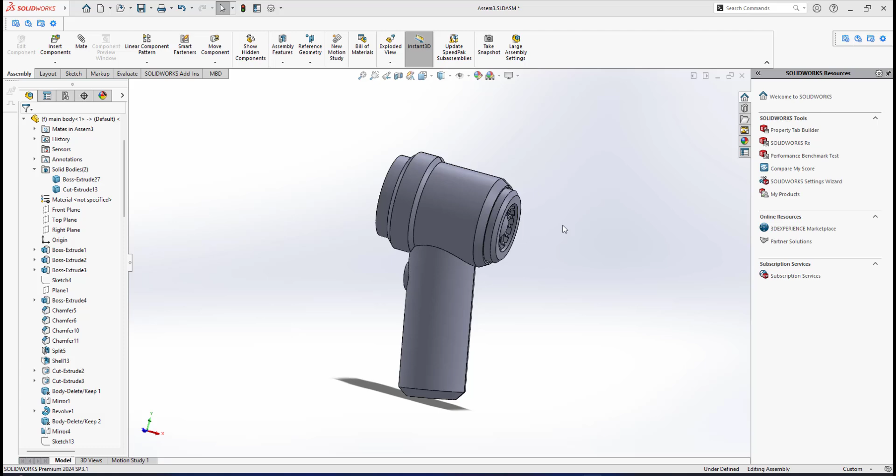In my previous video, I have already shown you how I have done detailing of this rear and front casing, where I have shown you how I have done the supporting ribs to hold the batteries, the rechargeable battery, and also the supporting slot to hold this PCB.

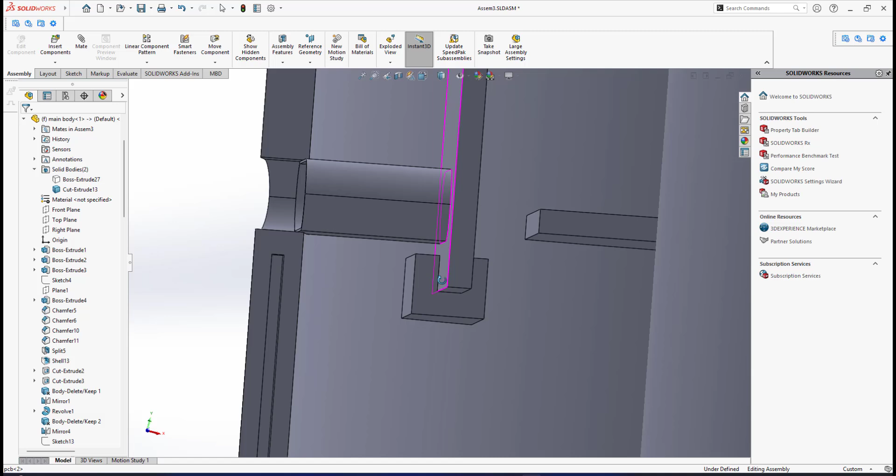Alright, actually I need to mention that I have made a few adjustments here, corrections here. In my previous video, the slot here was a little bit longer, and we had kind of an interference overlap with this USB port. So I have already made some adjustments, made it shorter so we don't have any interference, right? And also about the position of the battery, I have done some adjustment.

I made this battery a little bit lower, so it means that I have some more space here, because later I will show you how I will make cut through holes to make way for the wiring. Alright, so the position of the rechargeable battery I made lower.

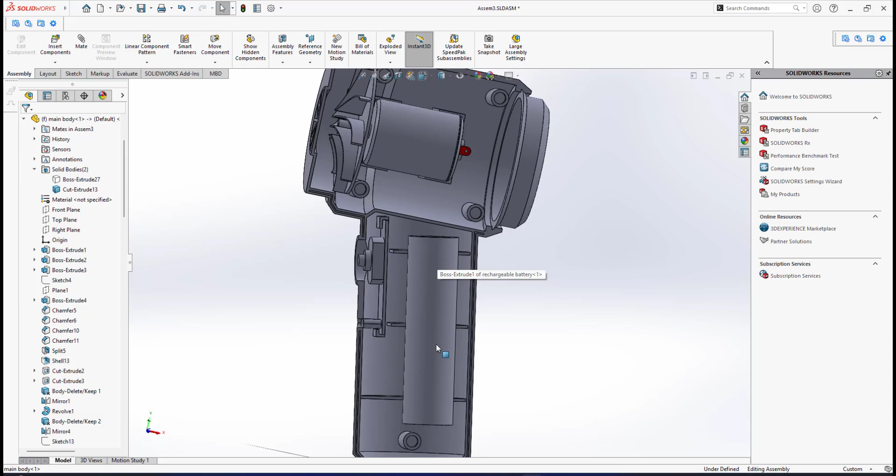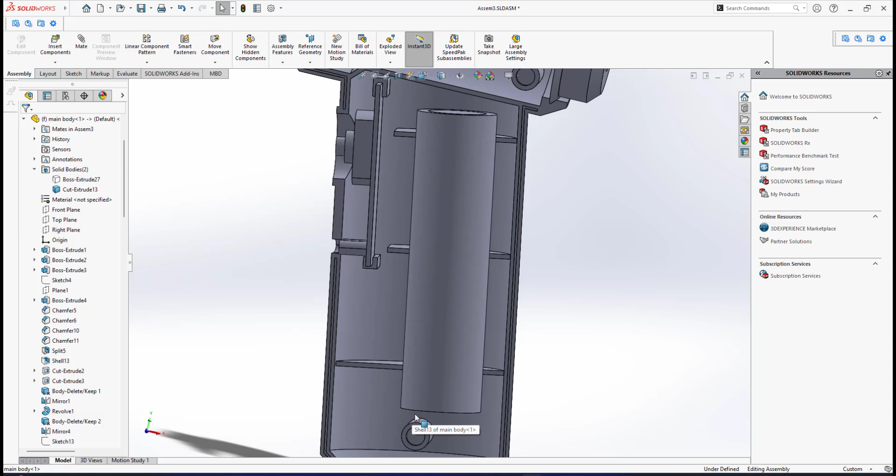Also, in my previous video, I forgot to add these features. If I'm not mistaken, in my part 3 video, I've shown you how I've done this pin for this rear casing, and also the other 4 pins for the front casing. I forgot to add those features at this position. So I added this pin at the rear casing, and also a pin at the front casing.

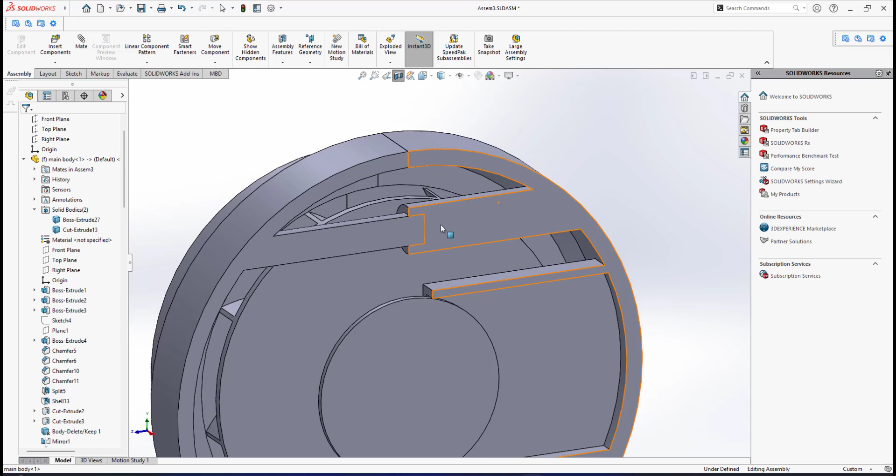So I will show you the continuation in this video for final detailing of this rear and front casing, where I will show you how I will do the fastening features. As you can see, on this front casing we have fastening features. If I go to the section view, since we have this pin on the front casing and this bigger pin on the rear casing, I will show you how I will insert a screw, where the screw does the fastening of this front and rear casing.

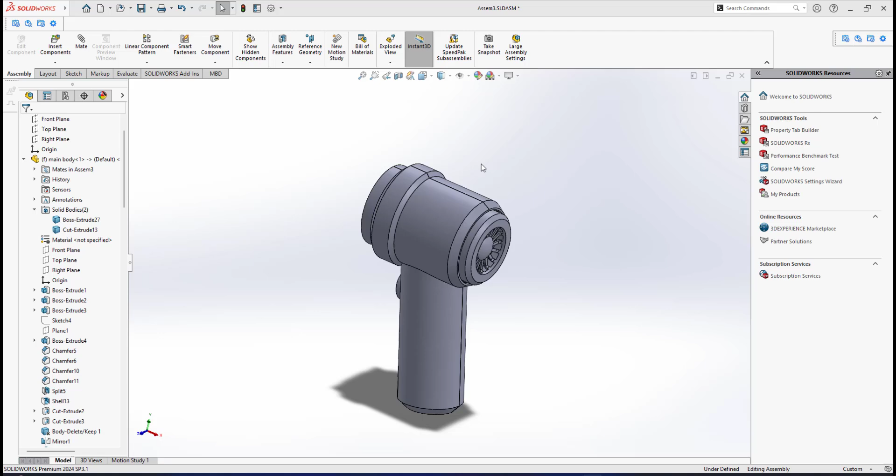So I will show you how I will create cut through holes here, and how I will do the inner thread for both pins here at the front and rear casing. Alright, so I will show you how I will do this in SolidWorks. To do the fastening features, I will not do it in assembly mode, I will do it in part modeling mode. So I open this main body file in part modeling mode. Alright, now I'm back in part modeling mode, where I have the front and rear casing.

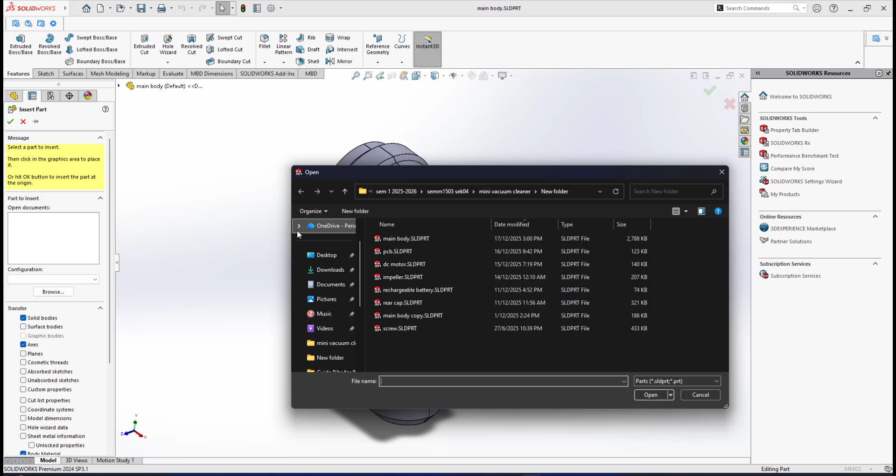Actually, I've already made a part model of this screw, the screw M1.5. It is an old file that I've done for my previous project, the portable mist spray fan. The same screw size, which is a small screw M1.5. So I will insert that part in this part modeling mode. Under the menu we have Insert, I will insert part. So I will browse for the screw here, the screw M1.5.

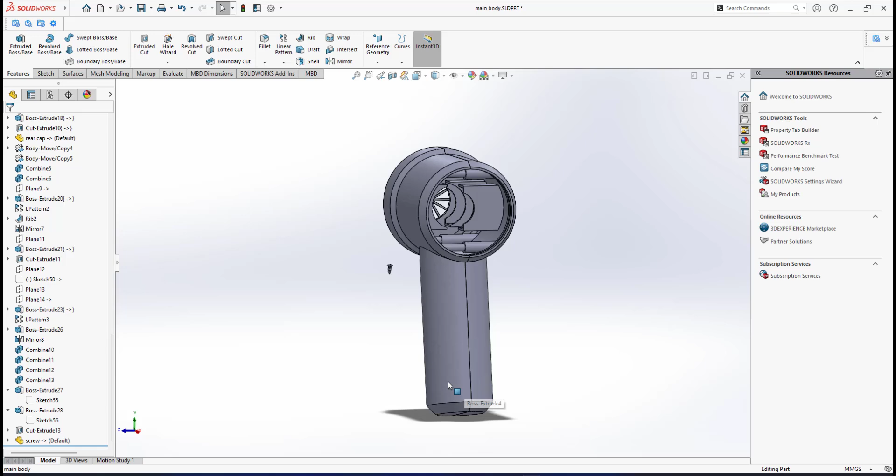So I will put the screw somewhere at this position. Alright, now I put the screw into position. Now I will clone this screw into 4 copies. Total is 5, because we have 4 pairs of pins at the top and 1 pair of pins at the bottom. But before I do that, I need to create cut through holes here. Since we need to fasten the screw at this position, I have to do 4 cut through holes here, and also 1 at the bottom.

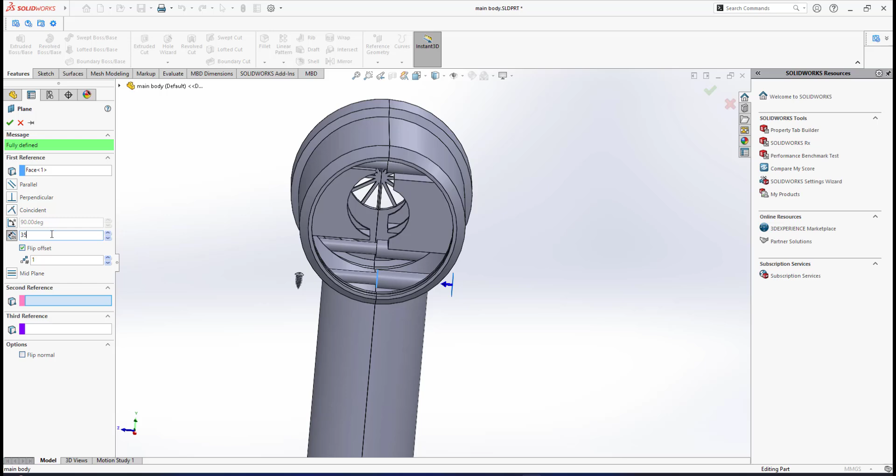Alright, in order for me to do that, I will go for plane, and I will select one of these flat planes. I'm not going in this direction, I go for flip. This is 25 from here. I think this plane is good enough. Let me put it much further, go for 35. Okay, this distance is 35. So I will do a sketch on this plane, and hold on, I want it to be turned to the back direction.

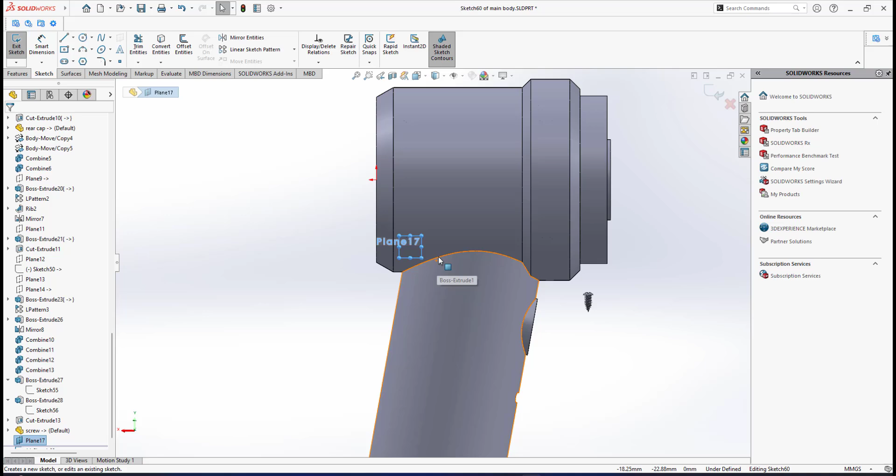So this is a back view from the rear casing, and I need to create the holes. First I go for shaded mode, the sketch mode, then I will make cut-through holes. Okay, the bigger circle here is the outline of the bigger pin on the rear casing. The cut-through hole is about the same size as this one, so I will select the smaller circle here, and also select this one.

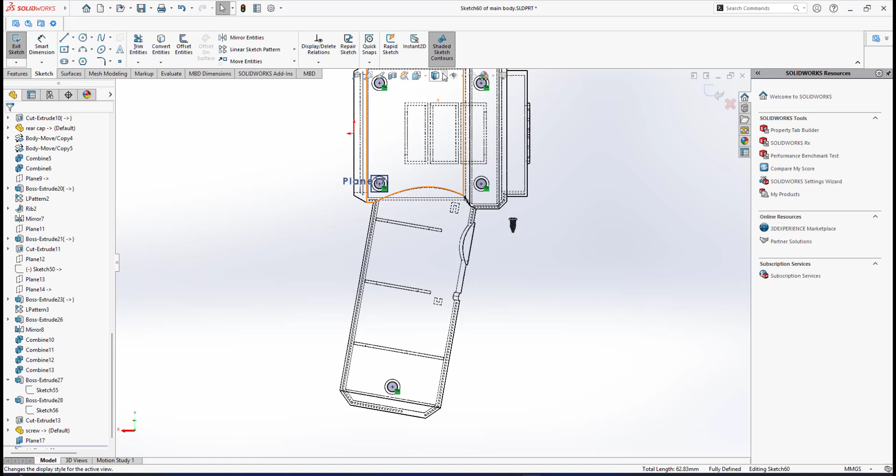I will select this one as well, and also the bottom one. Then I will convert entities. So I have a traced outline of those circles, and now I will do extruded cut. Alright, before I do extruded cut, let me exit first. I will isolate the rear casing first. I don't want to disturb the front casing.

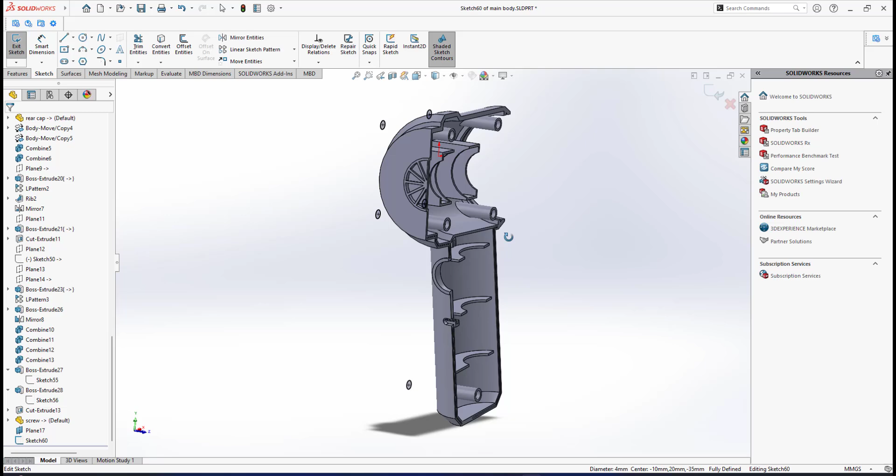And now I will edit this one, and now I will do extruded cut, features, extruded cut, and I go for this direction, and I must make sure that it's about, if I put on 25, let me check, let me go for 30. Okay, let me try for 30.

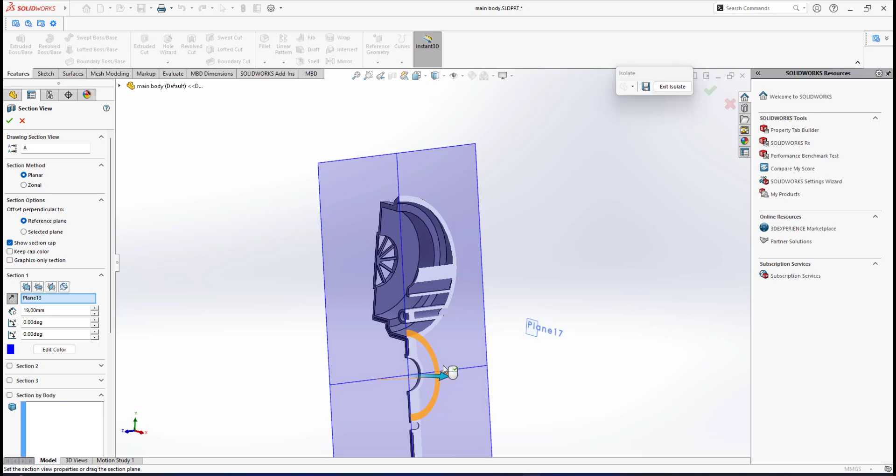So I made an extruded cut, and I will go for section view. Okay, let me go for section view. Then we have an extruded cut. Alright, for this at this position, and same goes for the other pin. As you can see, if I drag, we have a cutout up until this position. Right, same goes for the bottom pin.

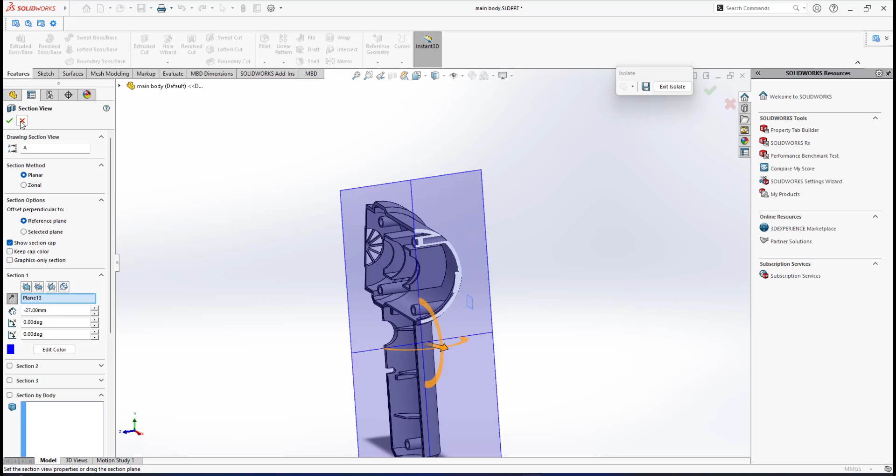Right, if I drag even further for the front pin, yeah, everything is good. Right, we have a cutout at this level. Alright, so I have done the cutout for the rear casing, and I exit isolate, then I save my file. Alright, then what I will do, I will do mate setting. First I must duplicate this into 4 copies.

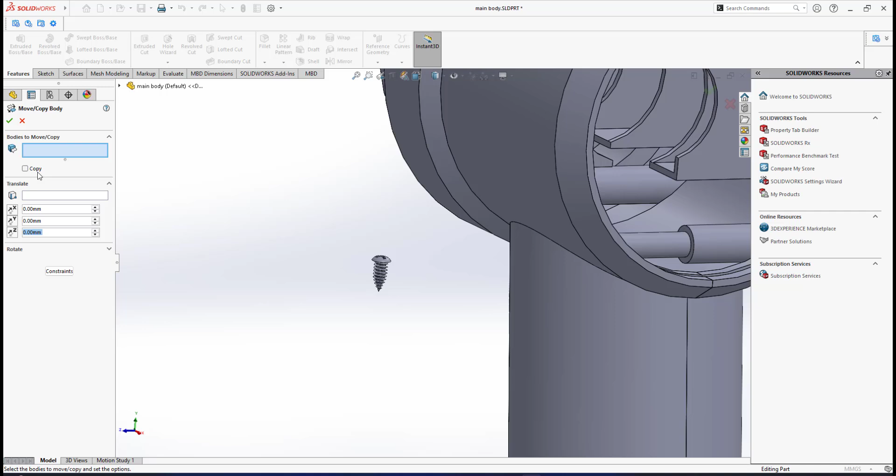Okay, in order for me to make this into 4 copies, I simply go for insert, features, move copy. I will not do the settings here, so I will go for the setting, translate, rotate, and make sure copy is checked. And now I select this original screw, then I make the copies 4, so it means the total screws I have is 5 screws.

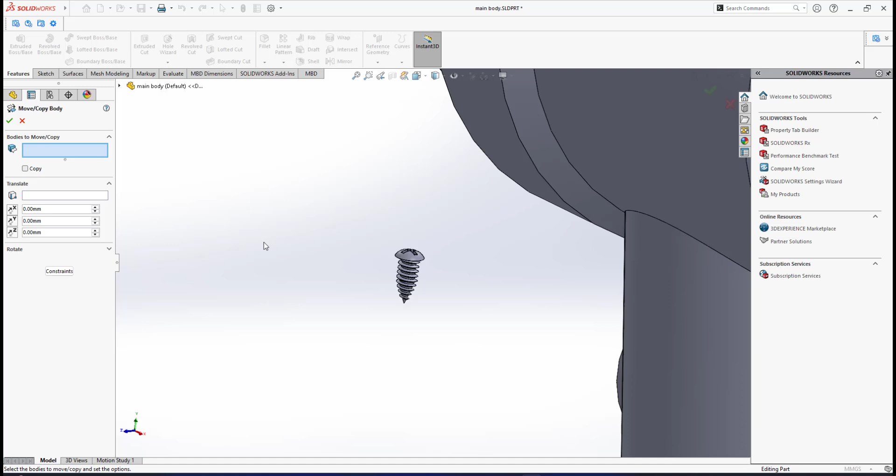Alright, since I have 5 screws already at the same position, let me just move them manually. Insert features, move copy. But now I uncheck the copy. I can move the clone here to somewhere at this position, and I have to do it one by one, and do again features, move copy. Make sure this copy is unchecked, because I simply want to move it. I don't want to clone to make a copy version.

Click again and insert features, move copy, select this one, and this one I put lower like this. Click OK, insert, do again. This one I put at this position. Right, so it's much easier for me to do the mate setting, since I need to put each screw into this hole.

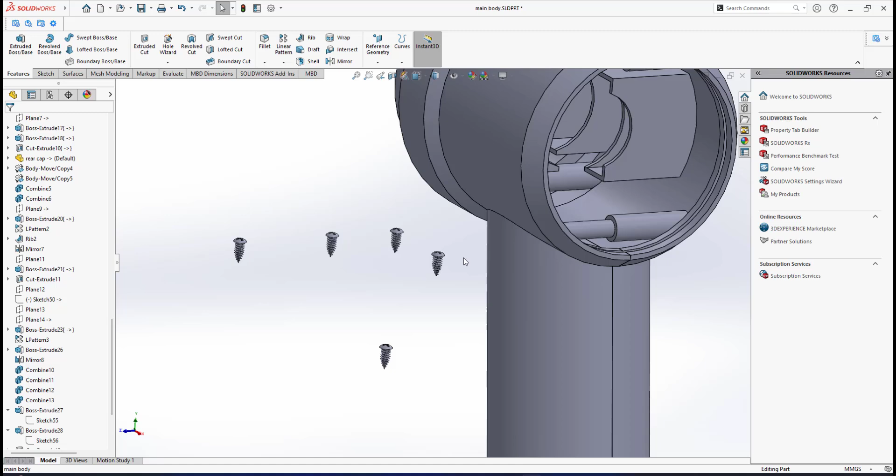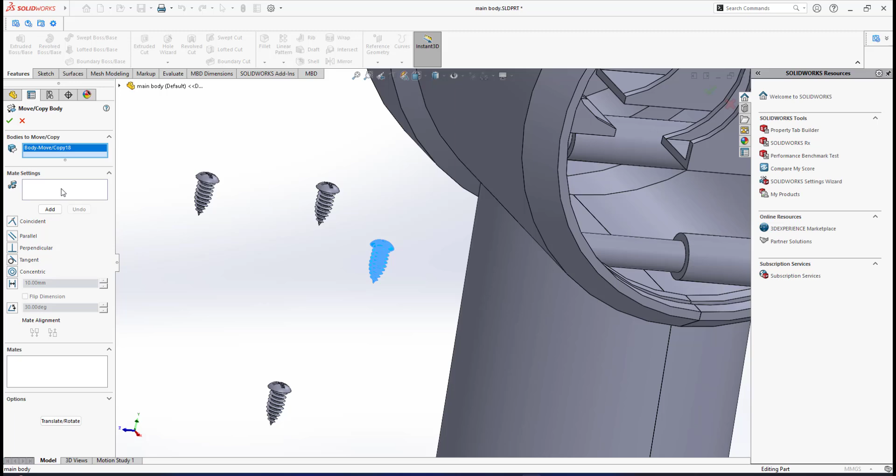Alright, for the first mate setting, I will do again insert features, move copy, then I will not do this setting, but the constraint setting. Okay, now bodies to move will be this screw. Here the setting is similar to the mate setting in assembly mode. So this screw, I have a cylindrical surface here, so I select the cylindrical surface, which will mesh with this cylindrical surface, so automatically it goes to concentric.

But as you can see here, the screw is turning to this direction, so under the mate alignment here, by default it is on the right one, so I click the left one. So it flips to this direction, and I must click add, so it means it reads the first setting.

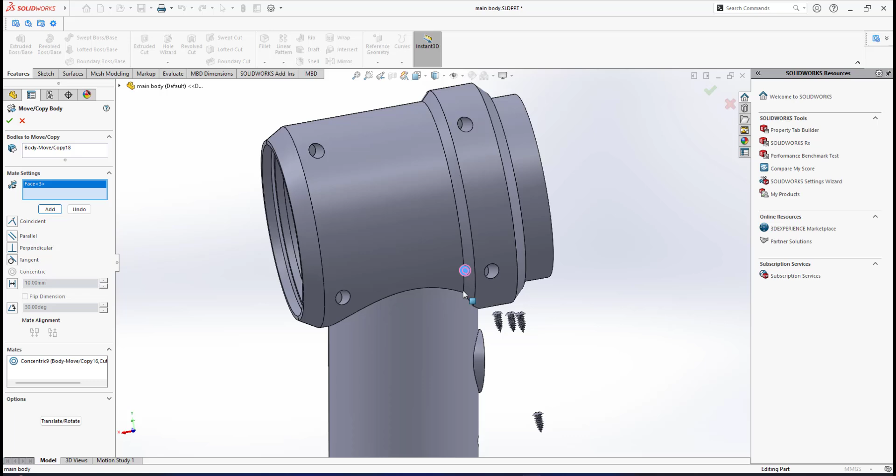Right? My second setting will be, I select this flat surface, because we have a dome head of the screw, but here a flat surface. That flat surface is already selected, and it must mesh with this flat surface, so the screw is in position. I click add, then I click OK. Now my first screw is in position. Alright, for my second screw I repeat the same.

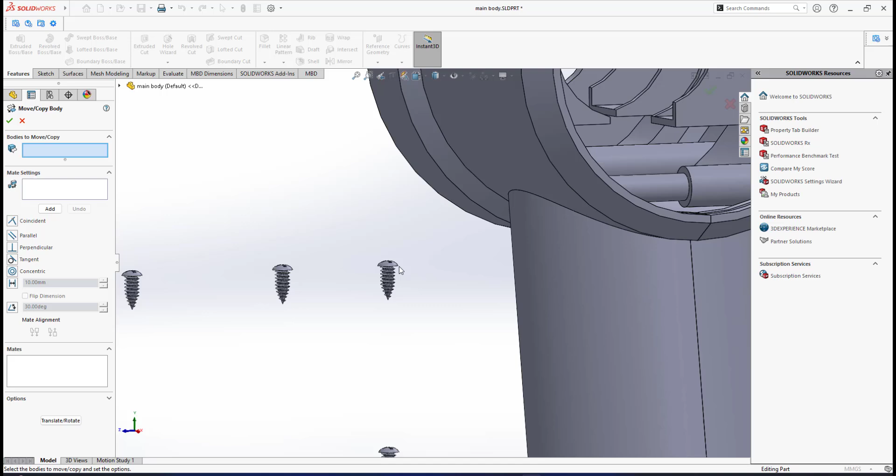Insert, features, move copy. Here bodies to move is this one. Mate setting, I select this cylindrical surface and it meshes with this one, but it turns to this direction. I go to mate alignment, I flip to this direction, I click add, and now my second setting, this flat surface must touch this surface. Then I click add and I click OK.

Alright, I will pause this video until I resume at the position where I have put the rest of these 3 screws into all these 3 holes. Alright, so I pause this video.

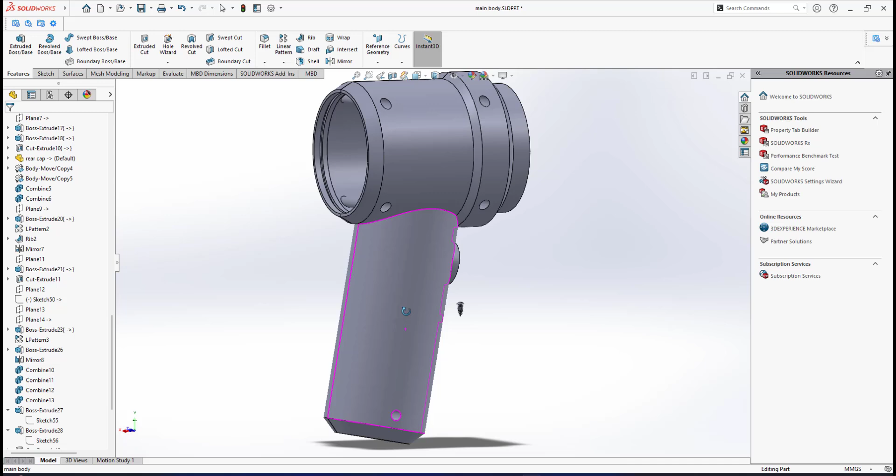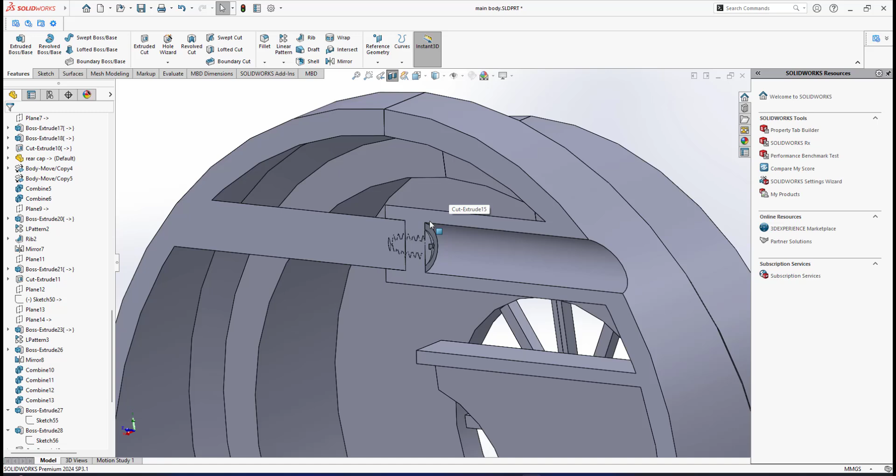Okay, now I have done putting all the 5 screws into position. Let me show you the section view. Okay, let me click OK. As you can see here, the screw is in position, all the 5 screws.

This screw is actually not meant to be in this part modeling file. The idea of me putting the screw into position is to create the inner thread of this pin on the rear casing, and also this pin on the front casing. So I will do combine, subtract to do the inner thread for this pair of pins.

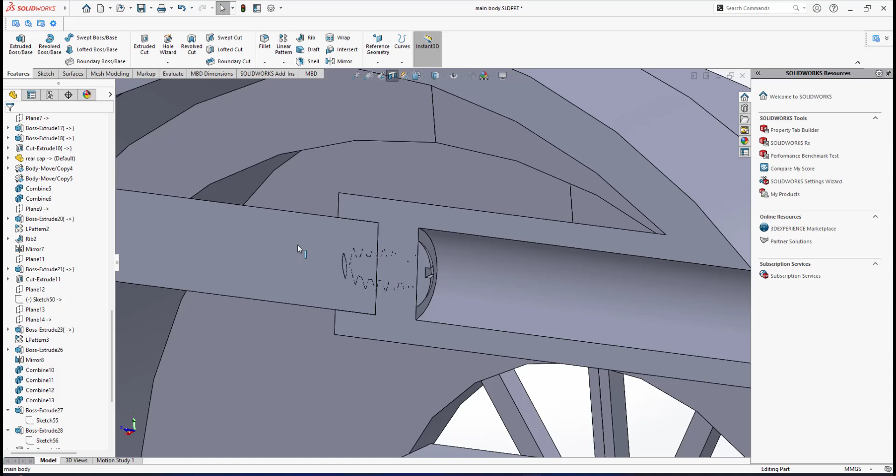In order for me to do subtract, each of the screws I need to clone. I want one to be subtracted from this pin, and the other clone version of the screw to be subtracted from the pin of the front casing. So it means both of these pins will have the inner thread. Okay, let me show you.

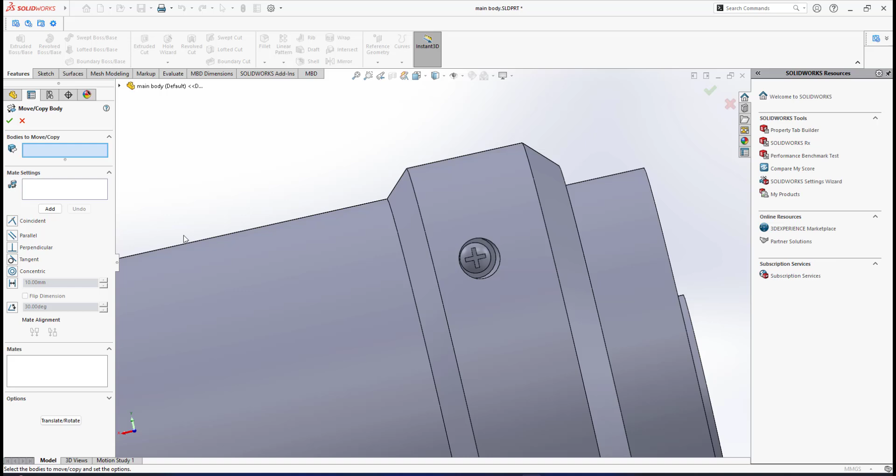Before I do subtract, I need to clone. It's kind of tedious, but this is the way I think we could do the inner threads. So I will use translate, rotate. Bodies to copy is this one. I cannot select everything because the list is only one by one.

Yeah, I can do that. Sorry, my mistake. I can do that, and I can select this one, this one, and this screw. Then hold on, delete it. Make sure I select the proper screw. Okay, this screw is selected. Actually this is the screw name, and this one as well.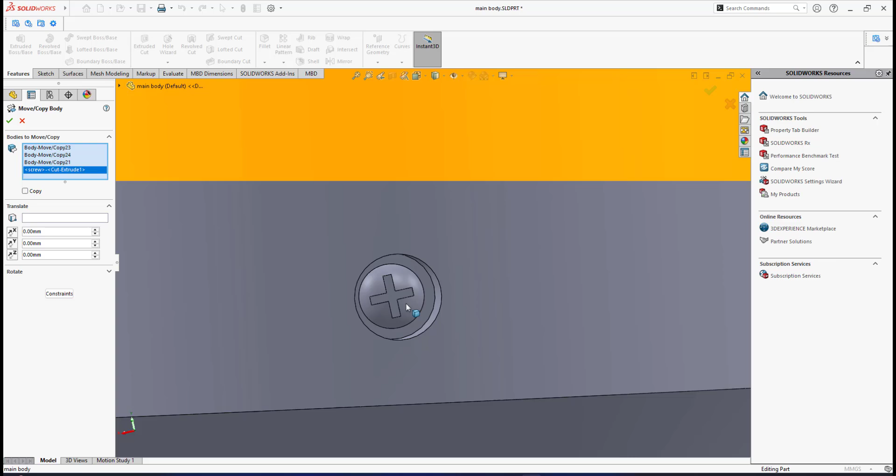Okay, so make sure copy, and the number is 1. I mean all the 5 screws have a clone version, a copied version. So I simply click OK. As you can see under the solid bodies, we have a total of 10 screws: 1, 2, 3, 4, 5, 6, 7, 8, 9, 10. So each screw here has a clone version.

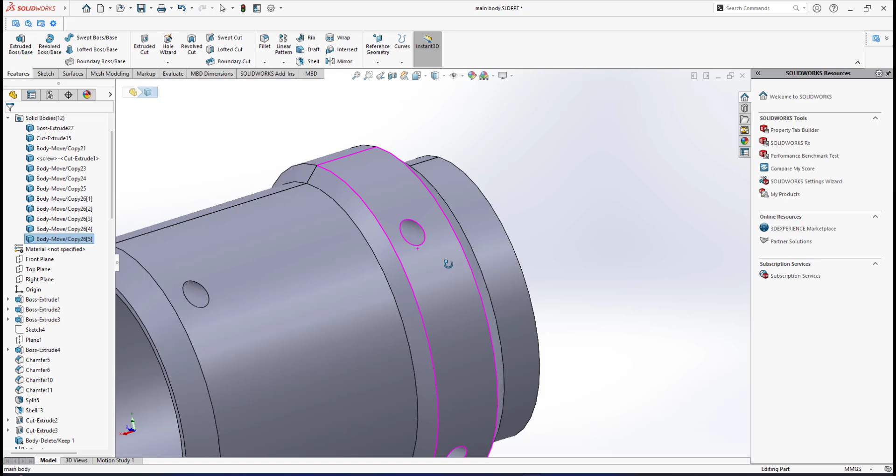In order for me to do this inner thread for the pin on the rear casing, since I have a duplicated version of all these screws, this one has the clone version here. So I will select on the list here. I will select the rear casing. Sorry, this is not the rear casing, this is the rear casing.

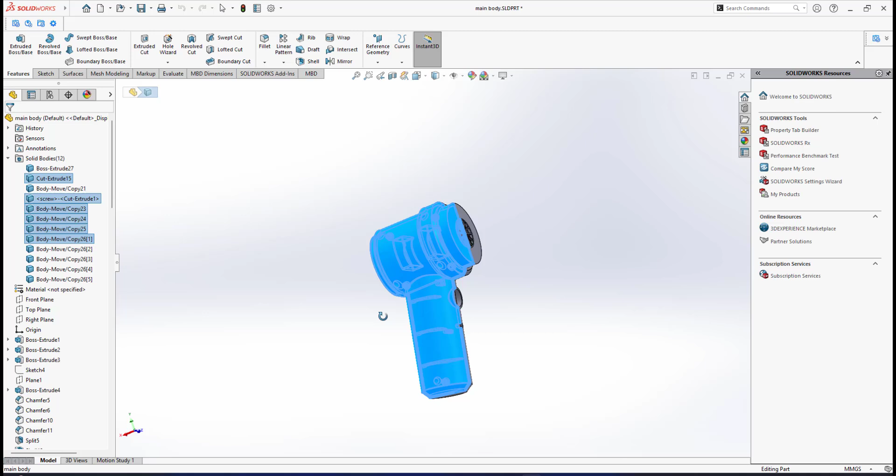I will select all the 5 screws. I select the rear casing, hold my control key, all the original 5 screws: 1, 2, 3, 4, 5. That will be the original one. Okay, let me do it again just to check. I want to make sure it highlights the right component.

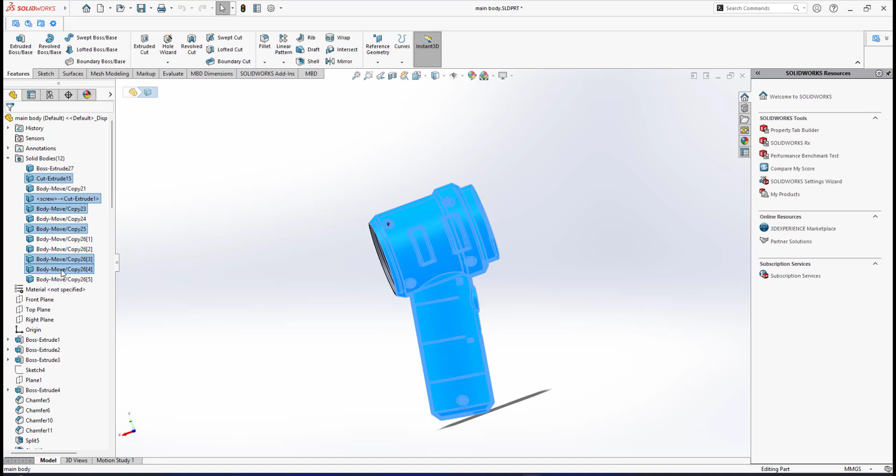So the rear casing, and I will select this screw, not this one, the screw at the back there, and this one, and also this one. So here I will do isolate. Okay, I still don't have one here, so this one I show it. So it means I have 5 screws there.

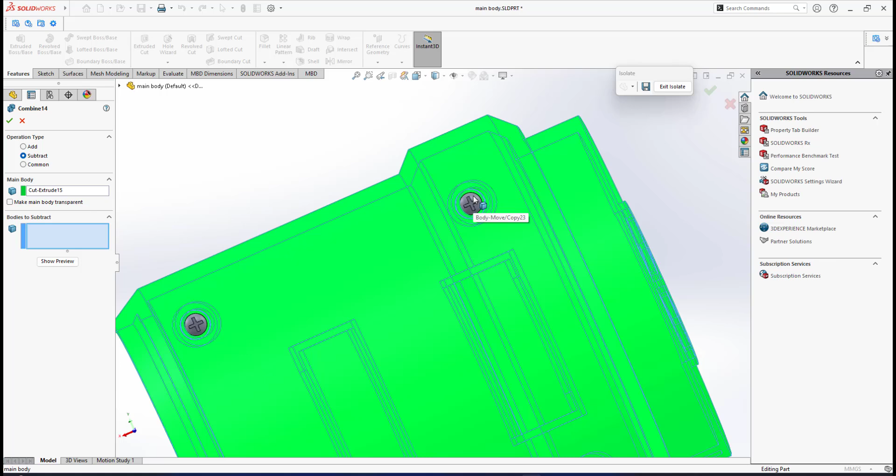So what I will do is subtract. Under insert we have features, then I use combine, then subtract. The main body will be this rear casing. Bodies to subtract, carefully select the 5 screws here. This one, carefully select this one, and this one. So it's already in the list, then I click OK.

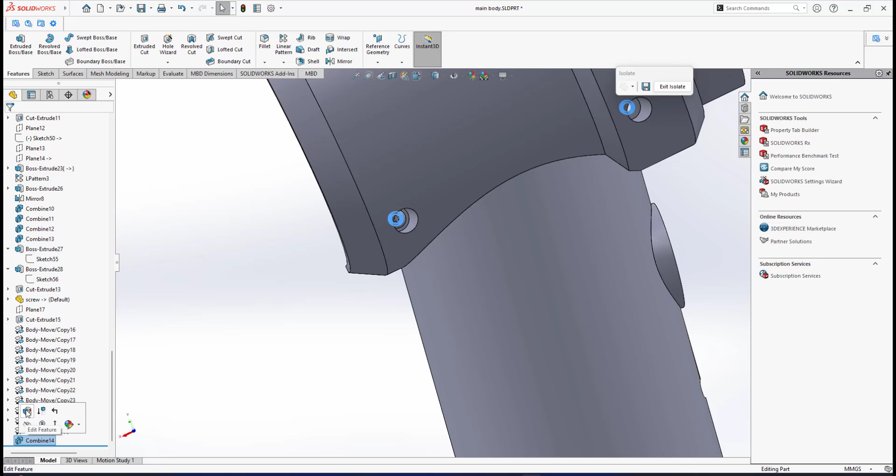Okay, as you can see now, I forgot about this one. Let me edit back this combine. I have this one, 2, 3, 4, 5. Okay, actually it's done already, because I think I have a clone version here. Let me exit isolate, and hold on. I isolate only the rear casing, just to show you.

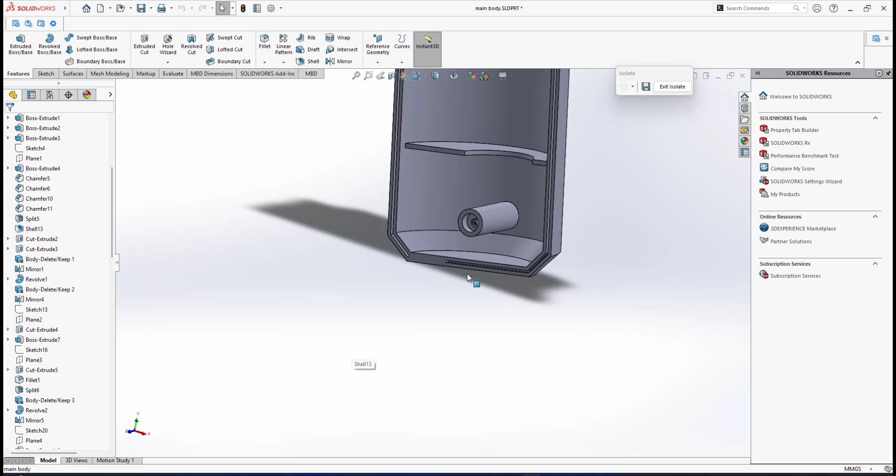For this pin of this rear casing, we have the inner thread. Yes, all the pins of this rear casing, we have cut out the inner thread, right? And same goes here. We have the inner thread. Okay, exit isolate, then I will repeat the same procedure for the front casing.

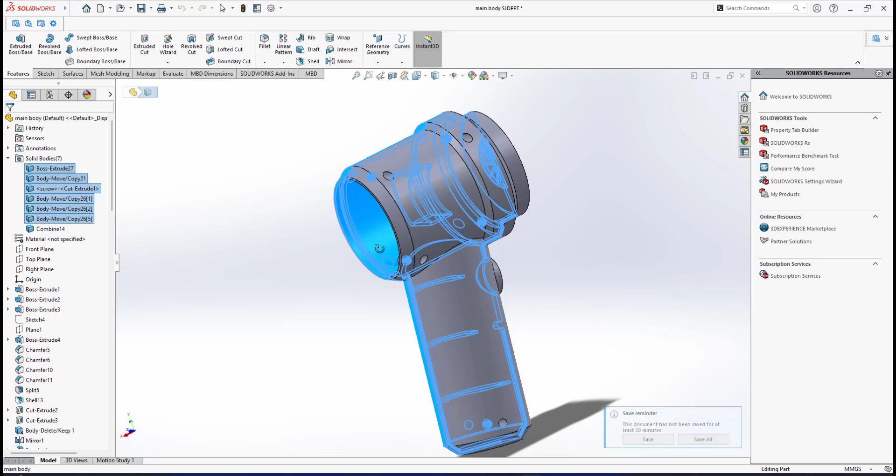So it means that for this front casing, I select the front casing and the 5 screws. Okay, I select the front casing, hold on my control key, the 5 screws, make sure it's highlighted just to make sure. 2, 3, 4, and okay, 1, 2, 3, and this one. All right, so this one will be the screw, so I isolate it.

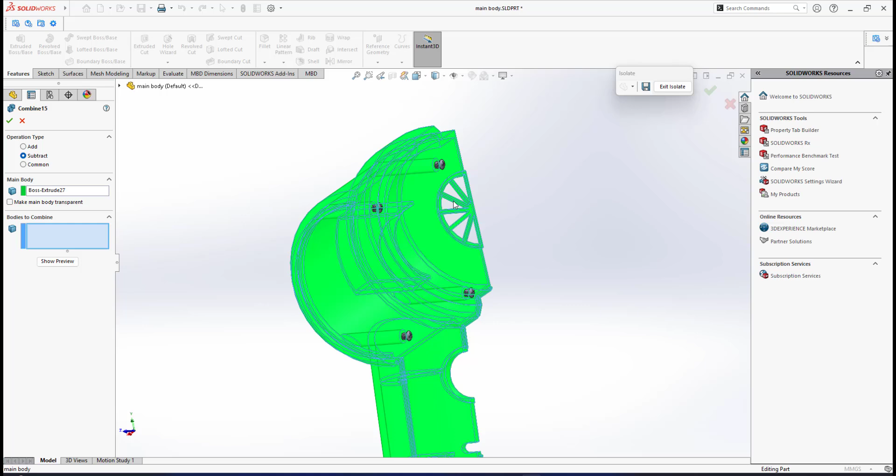Alright, now for this front casing, I will do insert, features, combine, subtract. Main body will be the front casing. Bodies to subtract, I'm using subtract. Bodies to subtract is these 5 screws. Then I click OK. Now as you can see, the front casing, we have the inner thread.

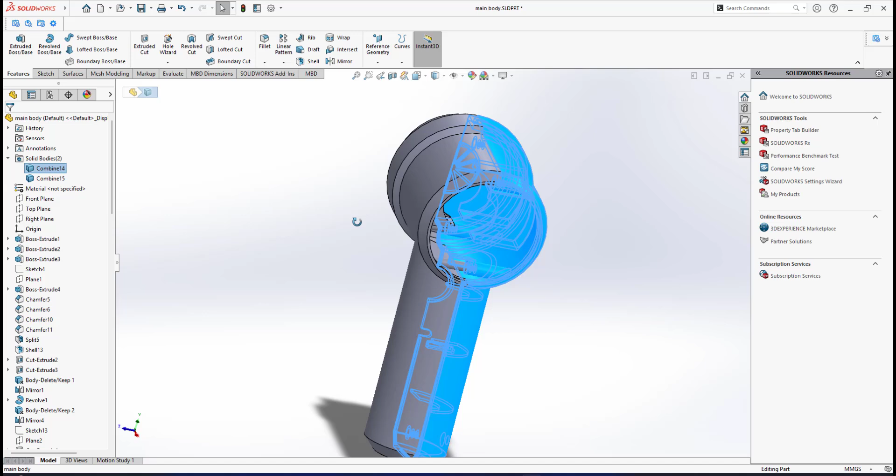So that's how I do things in SolidWorks, to create the inner thread for the rear casing, and also the inner thread for the front casing. I exit isolate, and now as you can see, we have only 2 solid bodies, the rear casing with the inner thread for the 4 pins of that rear casing, and also the front casing with inner thread for the 4 pins on the front casing. That's how I do things to make these features, right?

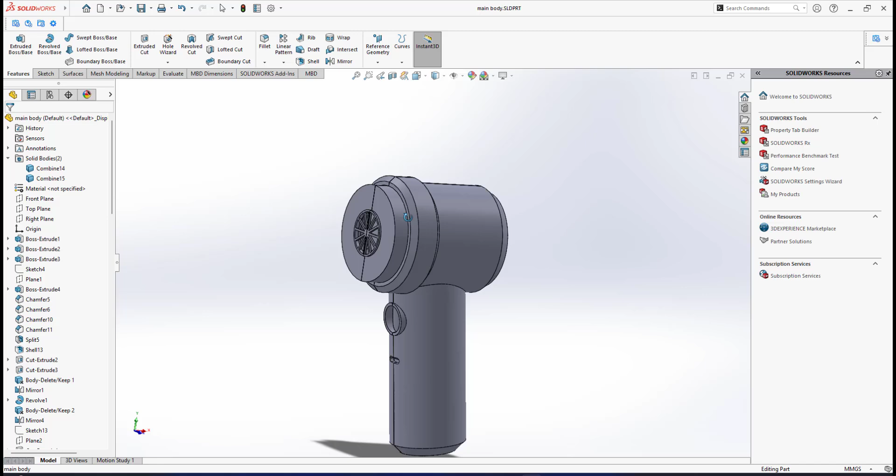Okay, the next thing to do, if you look at this main body, the end here actually will be attached to the cylindrical container. Let me show you the photo. So this is the cylindrical container that will be attached. Actually it goes in this direction, right? Will be attached at the end here. If you look at the cylindrical container, it's a hollow thing. Inside there we have a feature kind of like this shape, L shape, a slot, a cutout.

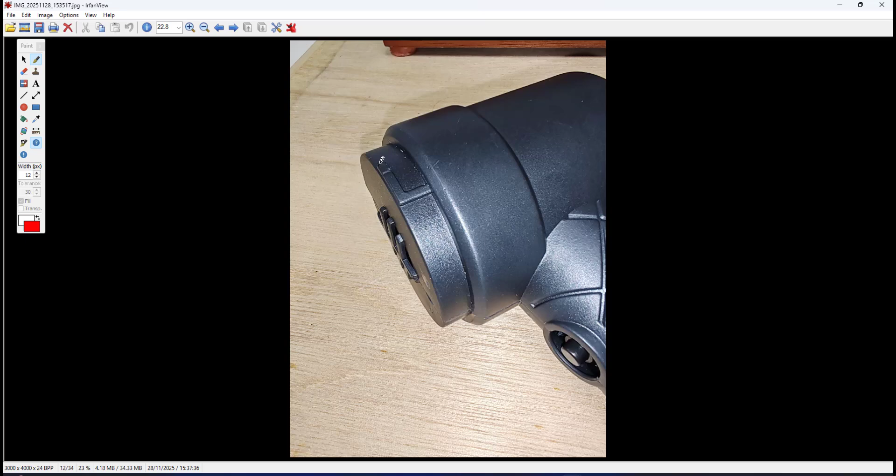But as you can see here, at the end of this main body, we have a key. The key is an L shape. Let me show you a closer picture. So this is the end of the main body, so we have a key of L shape here, right? So this is a kind of fastening feature that you can find in most plastic components on the market.

And okay, the way to create this key, let me undo this thing. Typically I can do it this way, but this one is not accurate. I make a plane above, I create the L shape, then I will do boss extrude from the surface with thickness of 1. So this is not the correct way to do it. It's not accurate. The accurate way to do this is not using boss extrude. I will use the wrap command.

Wrap command means that at this center plane, as you can see, when you look from the side, this is actually a circle, the cylindrical surface is a circle. I need to know the diameter of the cylindrical surface. So at that center, at the middle position there, I will create a wrapping rectangle. Hold on, my sketch, wrapping rectangle. The width of that rectangle is about the height of the cylinder. Right, so this wrapping rectangle will be wrapped around the cylindrical surface.

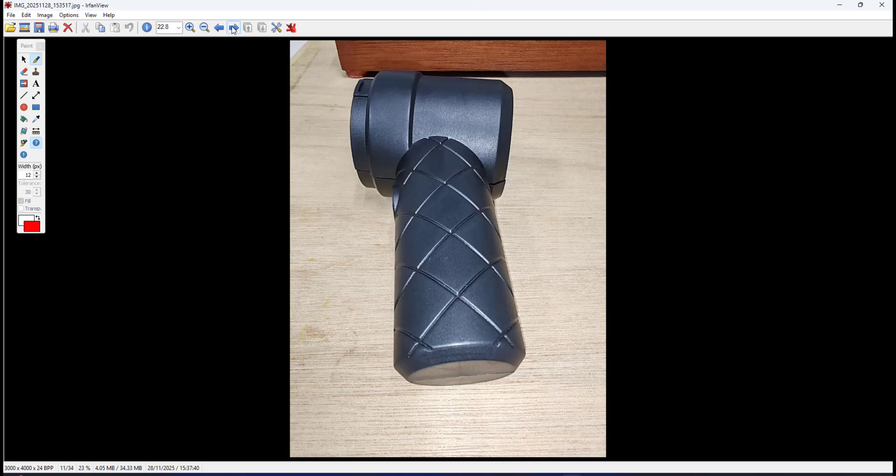So I need to know the diameter of the cylinder, and it means that the length of this rectangle is the circumference of the cylinder. So I need to create this rectangle, and the width is actually the height of the cylinder. So once I've done, let me undo, let me erase all this. Let me show you this view again. So I will do the wrapping rectangle at the middle there, at this plane.

Sorry about my sketch. So the length will be the circumference of the cylinder, and on this wrapping rectangle I will create an L shape with the exact dimensions, so that L shape will be wrapped around this cylinder. So this is the most accurate way to do the key. Okay, let me show you how I will do this in SolidWorks. Alright, now I have this. In SolidWorks, under the evaluate tab, I can measure the diameter of this cylinder. It states that the radius is 25, so the diameter is 50.

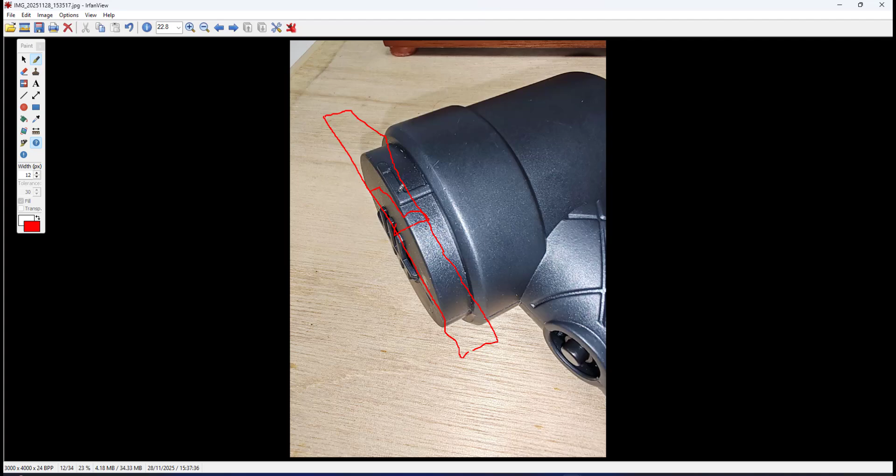So in order for me to create the key by using the wrap command, I have to create the L shape. If you look at this photo, the L shape will be like this. On this side, it means that I will create it at this side, not at the top side; at this quadrant I will create the L shape to create the key.

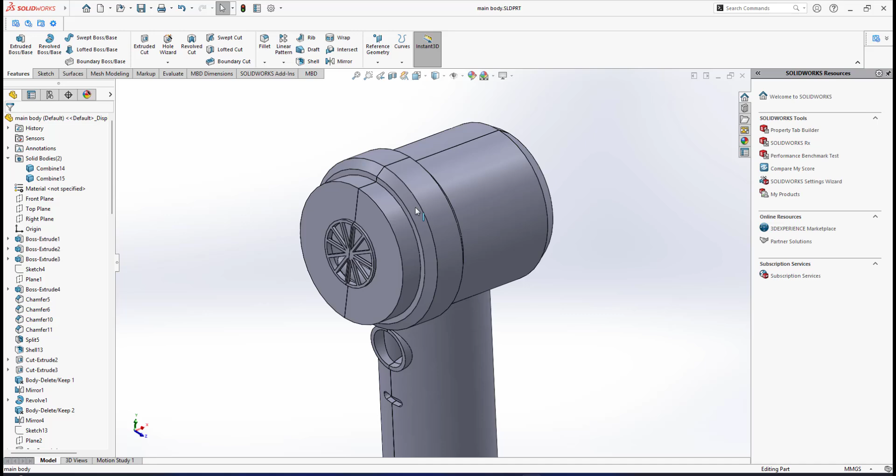Since I cannot do this at both ends, front and rear casing, since I have split this main body into front and rear casing, I need to do a clone version, a cylinder about this size. That cylinder is temporarily made for me to do the wrap command. Later I will show you how I will attach it to the front casing and also the rear casing. Just watch how I will do it.

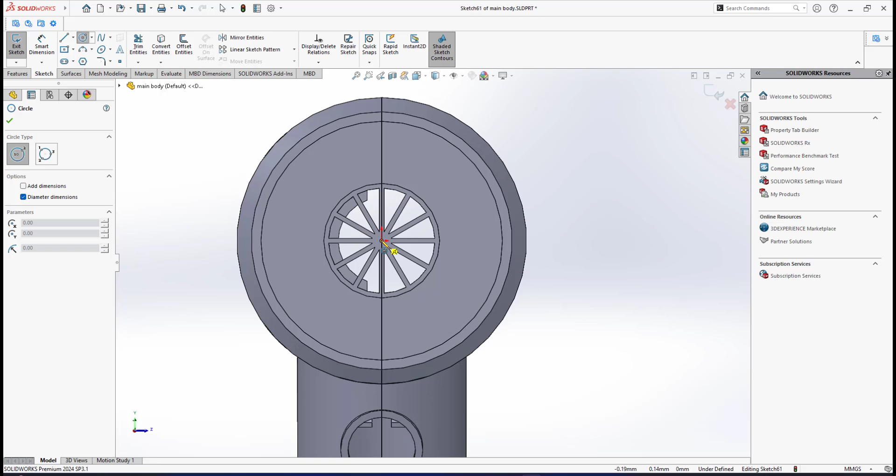So I will create a cylinder about the same size. Here I have a plane, so I create a sketch. I can draw a circle at this center point and snap at that point. So I have a traced outline; this is actually diameter 50. Then I will extrude. By default it is blind, so I will go extrude up to surface, and select the surface.

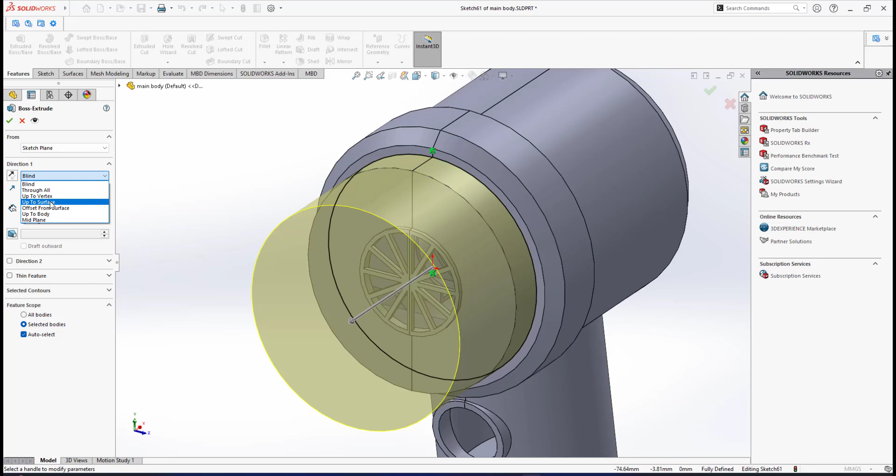So I have this temporary cylinder, but this is important: I must make sure that this is not merged. I uncheck merge result because I want to make it a separate body. I click OK, then I have this cylinder, Boss-Extrude 29, then I will isolate it. So this is the cylinder that I will do the wrap command on.

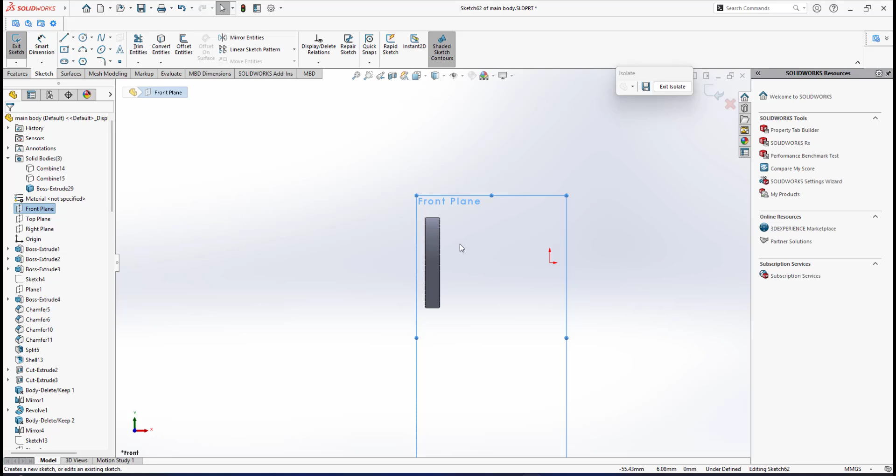If you look at the right plane, the front plane is actually lying in the middle. So I will click at the front plane and make a sketch. Now I'm in this viewing direction. I will create a center line from this middle point to this middle point, and now I will do the wrapping rectangle. I use the center point rectangle, then this edge I will make collinear.

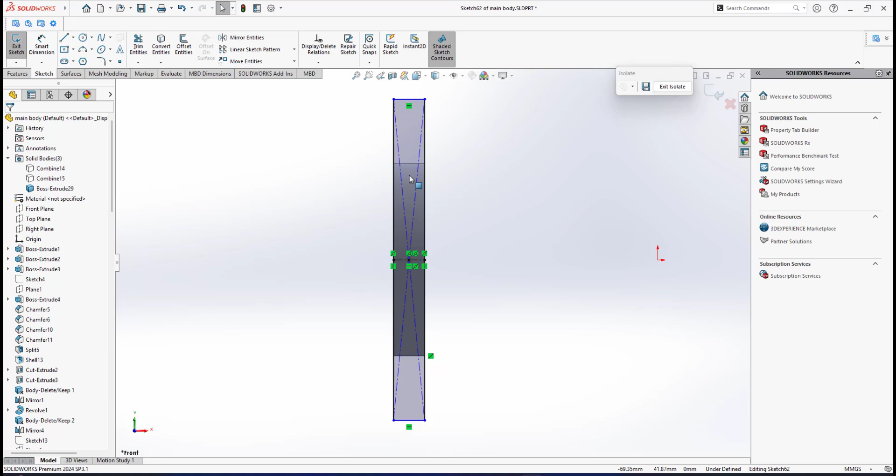About the length of this rectangle: since the diameter is 50, the length will be the circumference of that cylinder, so 2 pi radius, 2 pi times 25. So I will give a dimension. Actually there is a way, but I cannot recall it; you can put a symbol pi, 2 pi times 25. I will simply show you how to do it by using a calculator.

So the circumference will be 2 times pi times radius, which is 25. So the value is this value. I will select all and copy. This will be the value of the circumference. So I will put a dimension here, click, and paste the value. So this is the circumference of the cylinder of diameter 50.

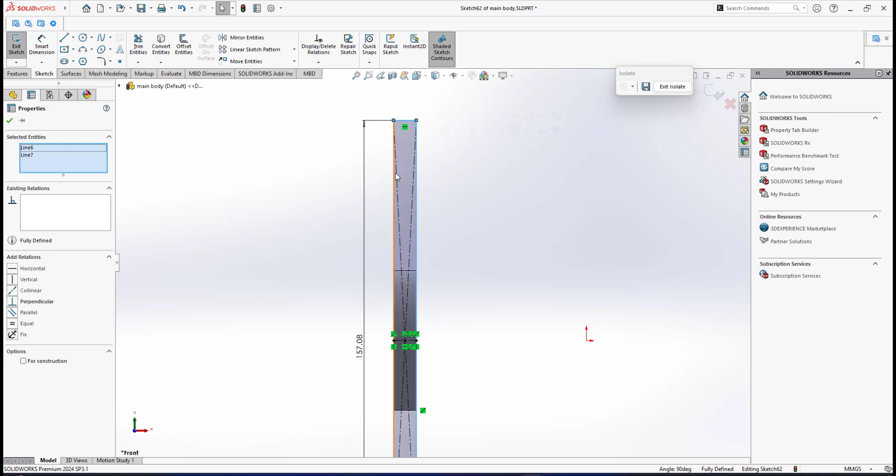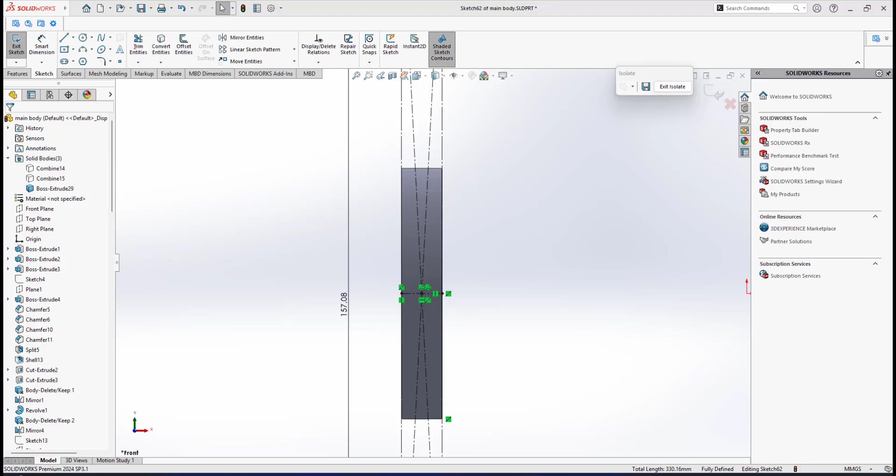So here in SolidWorks, I simply create a line first, because I need to position this L shape in the middle from the center line. So I simply create a straight vertical line. Then I will give a dimension of 13.

Alright, then I will bring my mouse here and right click at it. I go for midpoint, so it's already highlighted the middle point, and hold down my control key and select this point. Then I go for coincident, so it means this line will be balanced in the middle, right? Okay, now I will create the L shape, so another line will be touched at the end.

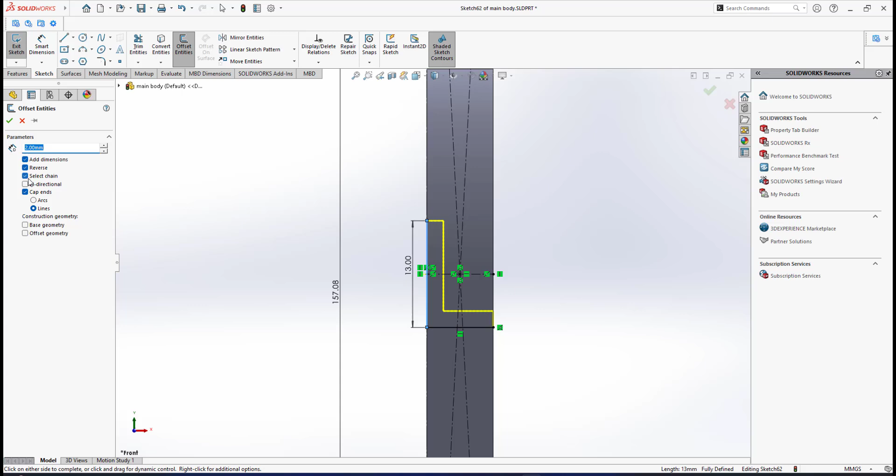Now I have the L outline, and then I will do offset. So as mentioned is 2. Then I will select this line, reverse direction, and make sure that select chain is on. That's why I can trace all the outline there, and also the cap ends is line. So I have this outline for me to create the wrap command. So I exit the sketch. Okay, I need to exit the sketch.

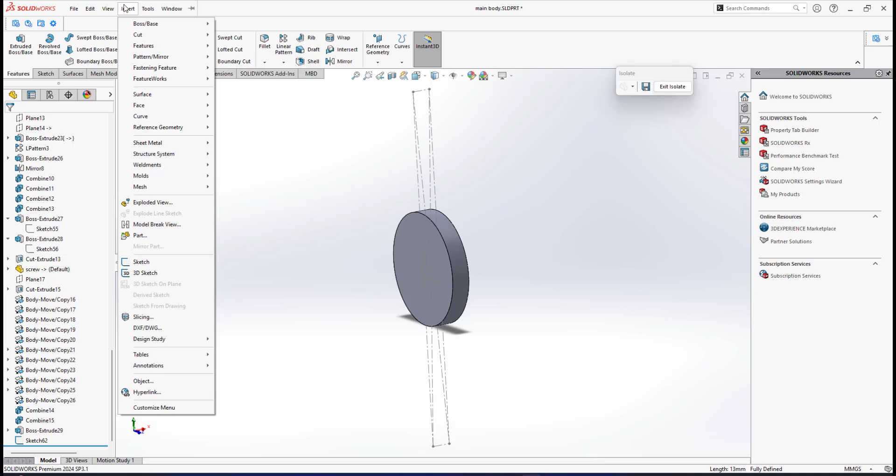Here under the insert features we have wrap. Okay, wrap command. So first I need to select the sketch, so I select any line here, and now this is a setting for wrap. And as you can see, the first option is for emboss. Emboss will mean it will create a key. Deboss will be a cutout to create the slot.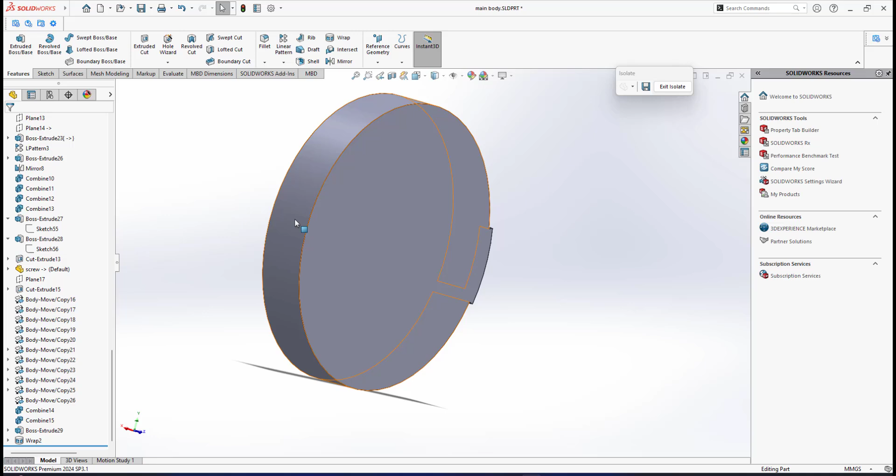Okay, what about on the other side? Since we have two keys on the other side. Actually it's not shown here. One is here, the other side will be there. So on the other side I cannot do mirror because the L shape orientation also will be at this quadrant. I cannot do mirror because it is a mirror representation, so it's not the L shape when looking from this direction. So I need to do circular pattern.

Alright, we have circular pattern, so the direction can be the circular edge, and the features to pattern I can use the list here. The last one that I've done is wrap. Okay, here be careful about if I simply click OK, so what will happen? I need to show you. So it become like this, so this is not correct. And let me edit back the circular pattern.

Then I will go for geometry pattern, and here I will go, instead of selected body, I go for all bodies. And if I click OK, as you can see now I have this key on the other side. Alright, this will be the key, but actually this cylinder is not meant. If I exit, actually this cylinder is overlap with the front and rear casing.

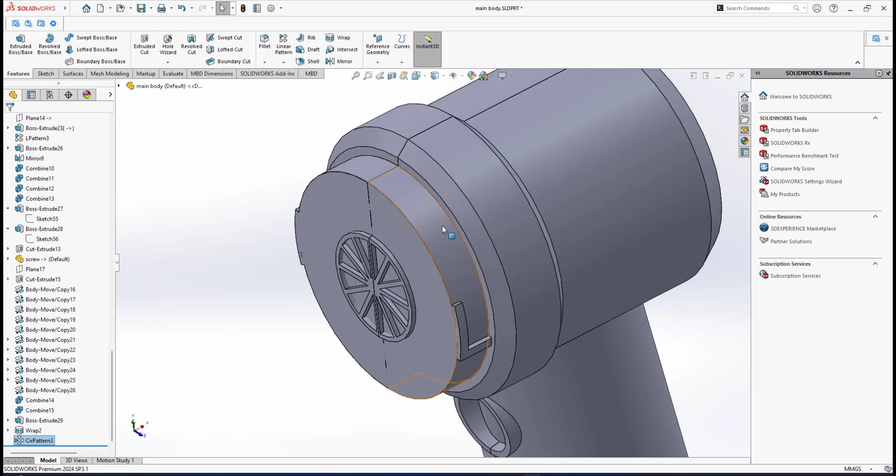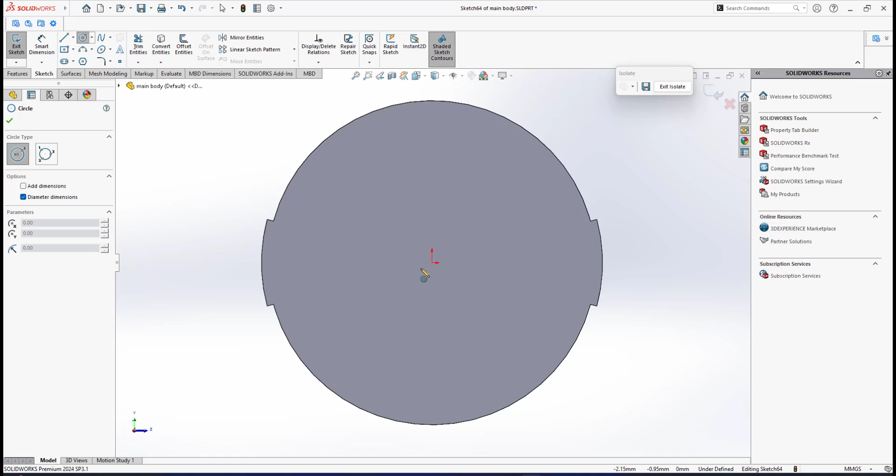Okay, let me isolate this cylinder first. The features that I need is only these two keys here, so it means this cylinder I will make a cutout, right? So it means that I can go to this plane, then I will create a circle. Hold on, it's not reading. I will create a circle from this point up until it touch this point, so I have a circle there.

So this one I will do features extruded cut, and I can go through all. And now I just simply click OK, and now I have only the two keys. Alright, so these are two keys. If I exit isolate, if you look on the list, we have the back is cut extrude 16, and this one is the front key.

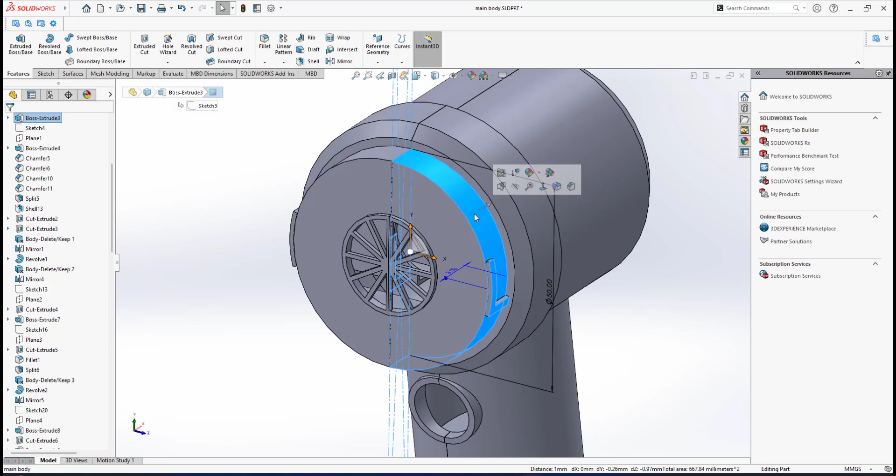So what I will do, this body, this one and the rear casing, I will isolate it. Then this one I will join it by using insert features, combine. I will add the front casing and this key, so add, and it merge as one body. I have the key there.

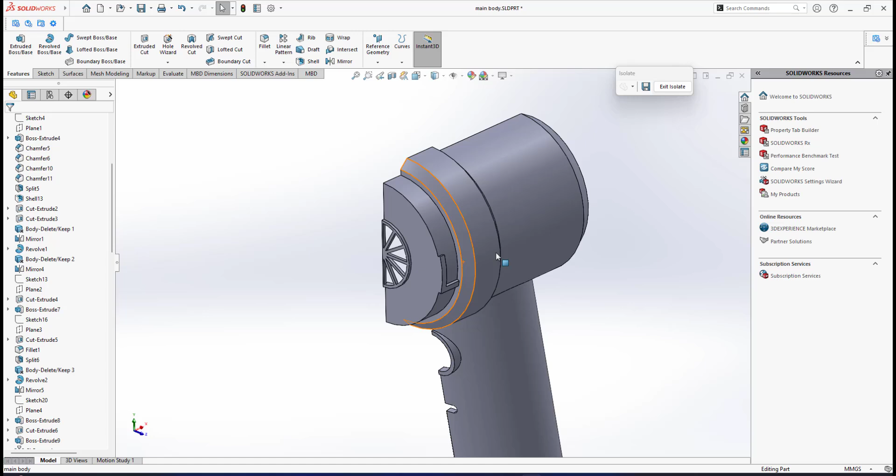And about the rear casing, I will select this key, and the rear casing I isolate it, and then I will merge it, combine, use add, this one and this one. And now if I exit isolate, now both the rear casing and the front casing, we have this key.

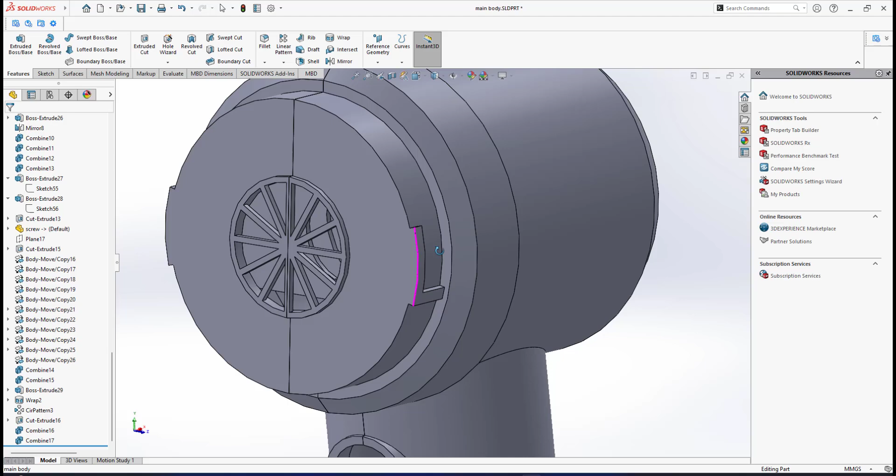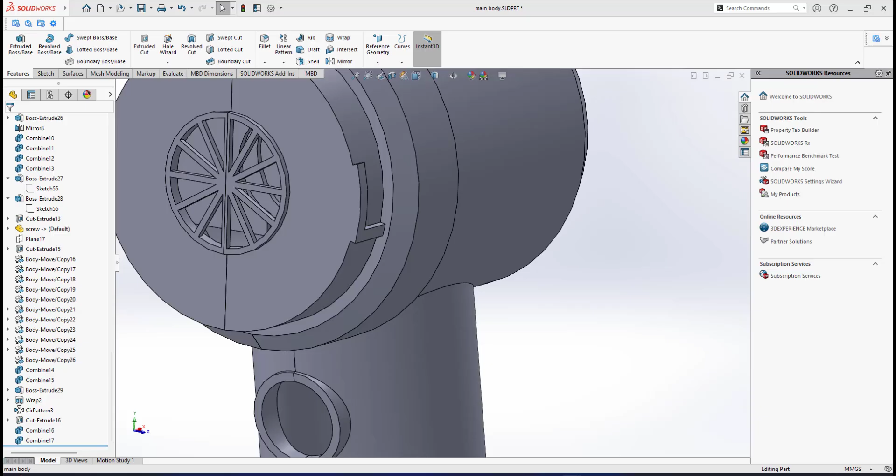Alright, so I need to do this. Let me isolate the front casing here, and on this plane I will create a sketch. I will do a center line from the center point, and it touches this quadrant. Actually this is coincident with this circular edge; it looks off because of the display resolution of my screen, right? So I will create another center line from the center point from here. I will give an angular dimension. This one I can go for 8.

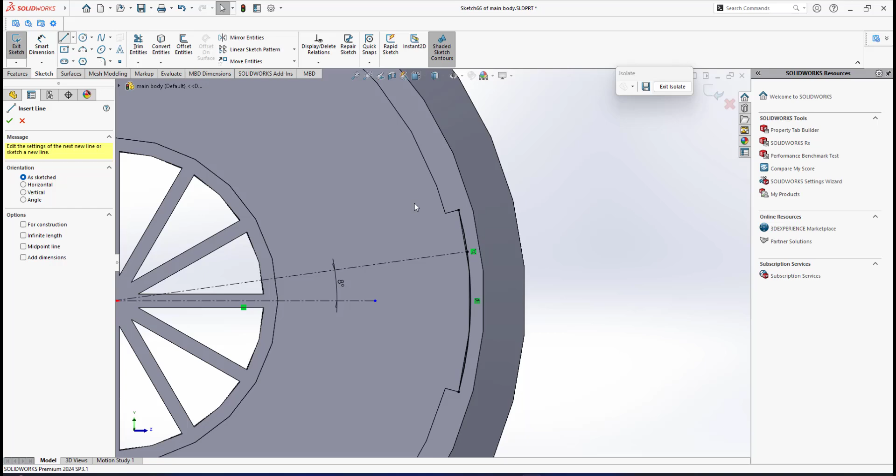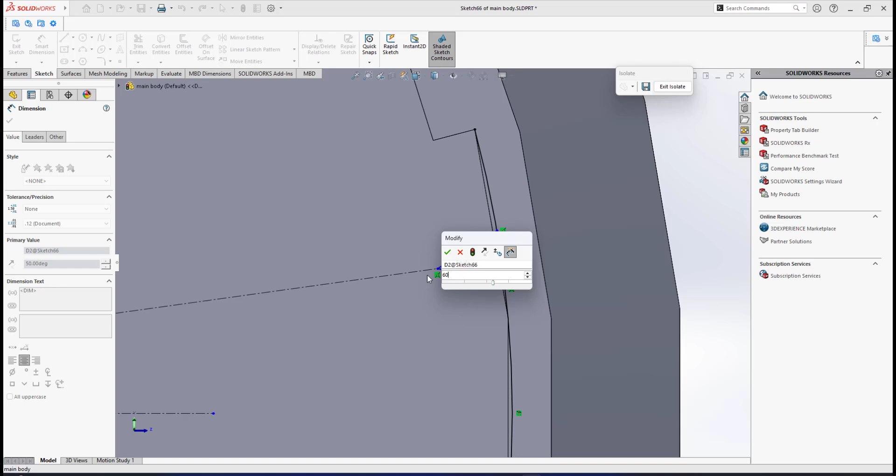And now I will trace the circular edge and convert entities. Then I will create this line to make a V cutout, right? This line is touching the circular edge, and I will make this one equal, and I need to give the angular dimension. So this one I can go for maybe 50. Hold on. Okay, 50 is the cutout. Let me go for 60. Since the blue color is underdefined, I need to give the radius value from this point to the center. I don't want it to be too deep at the side, so I go for 25.

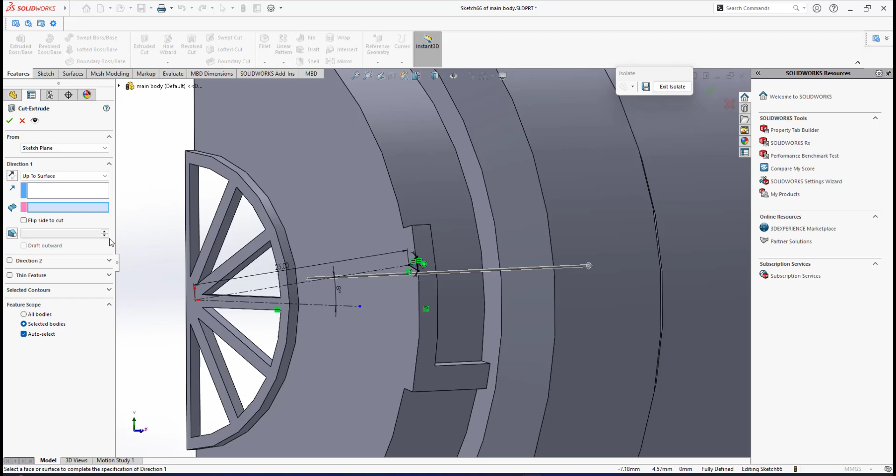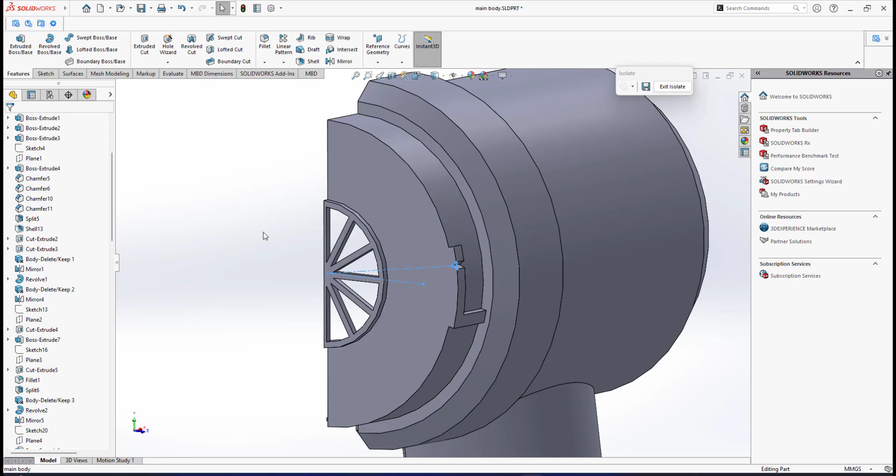And now I can do trim, so I have the outline to create the V groove, right? Features, I will do extruded cut, using up to surface and stop at this face. Then I click OK. Then I have this. Okay, so I will do the same at the back casing. I will pause this video and resume once I have done the same for the back casing. Okay, now I have done the V cutout for both the front casing and the back casing here. I think I've done complete detailing of this front and rear casing.

Inshallah, in the next video I will do another part modeling, which is the cylindrical container here. We have some features here, and also we have a cutout. Since I'm doing the wrap command for emboss here, here I will do this L shape with the same wrap command, but this one is deboss, so it will be a cutout. Okay, inshallah I will see you in the next video.